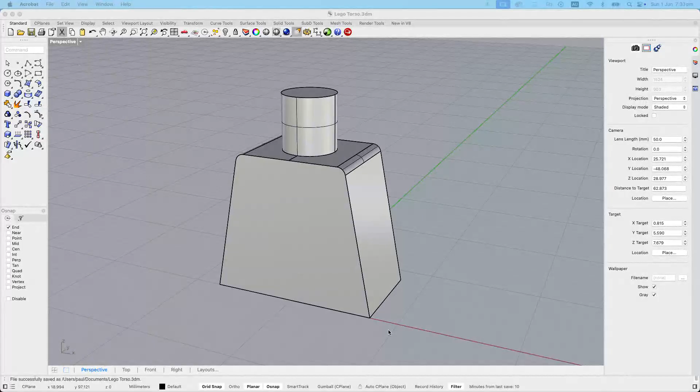This is basically the 3D model that we're going to make. It's pretty straightforward, but basically it's a trapezium that we extrude. It's got a cylinder on top, and of course it's got some filleted edges, just rounded off edges on that top sort of face.

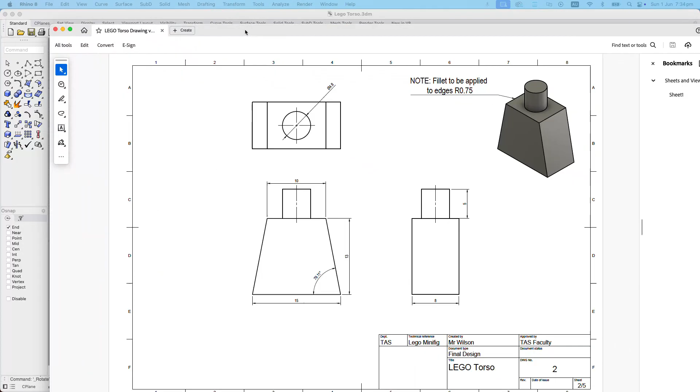So to help you with this, what we actually have is the drawing. I'll just bring across the drawing here and we can have a little look at that. We can see that in the front view, it basically looks like a trapezium. We've got some dimensions - this line across the bottom is 15 millimeters. This horizontal line up here is 10 millimeters, and the distance between those two is 13 millimeters. If I wanted to get picky, I can also see that the angle is 79.11 degrees in here.

There's a couple of things I might look at here - this is symmetrical if I put a mirror through here. So I might just model up half of this and just mirror it across there, which will give me that. What else have we got? Of course, we need to make that into a surface, like that, and then we can extrude it.

How far do we extrude it? Well, if you have a look at the drawing, it actually tells us, because in the right side view over here, we can see the distance that it's extruded, and we can see that it's a total of 8 millimeters.

Then, of course, there is this cylinder on top. We can see that the diameter of that circle is a diameter of 4.8, and you can see it's got like a funny zero sign - not quite a normal zero, but a circle with a cross through it, and that's the symbol we know as being a diameter. So 4.8 millimeter diameter, and we can see how far it's extruded upwards because we've got the 5 millimeters there.

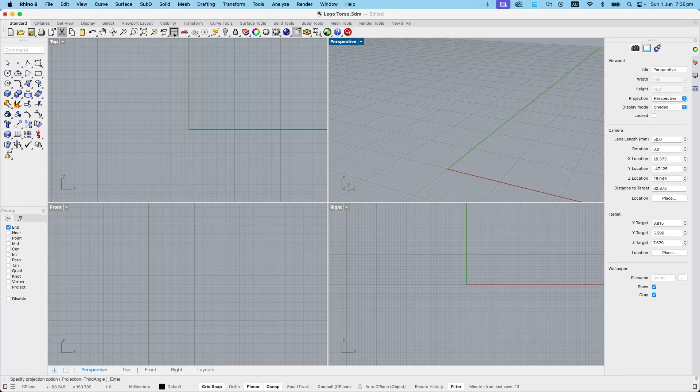I'm going to start afresh here. I'm going to actually get rid of this guy, just hit the delete key. We'll reset our 4 viewports. And here we are, so let's work in our front viewport. As always, make sure you've got grid snap turned on, planar and Osnap. I think we're all used to that by now.

I'm going to use the polyline tool. The start of the polyline tool, I'm basically going to start it here. Half of 15 was 7.5, so we'll type 7.5 into our command line, and we have designated that line there as being 7.5. I'll click there and just hit enter to finish my line. So there it is, 7.5.

Now, if I come back and bring this drawing back in here, I can see that the height, or the distance between this line and this line, is in fact 13 millimeters. So let's do that - let's draw a reference line 13 millimeters long.

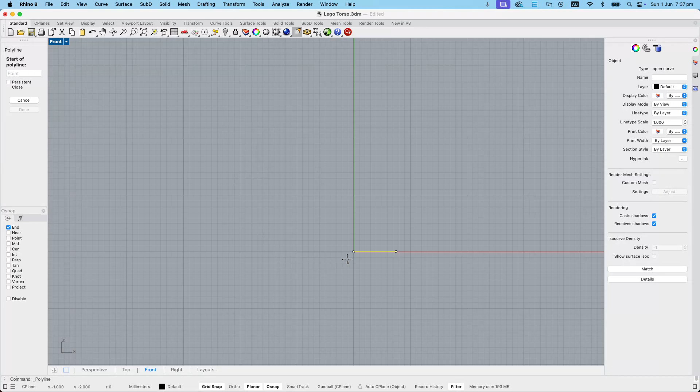So I'm going to hit polyline. I'm actually going to start here and type in 13, and I'm going to lock that in just there, and then just hit enter. So we now have a line that's 13 millimeters.

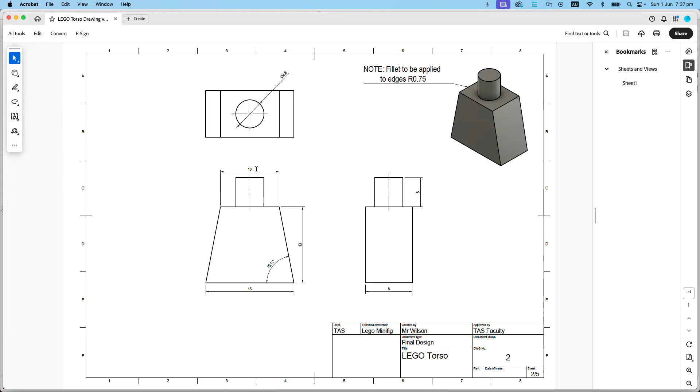Easy peasy. Now, you might also remember that this distance here is 5 millimeters. So let's do that, we'll move that back over there. And we'll go with the polyline and 5 millimeters, we'll hold shift to make that horizontal. And then whilst I'm still connected, let's connect that down to the bottom.

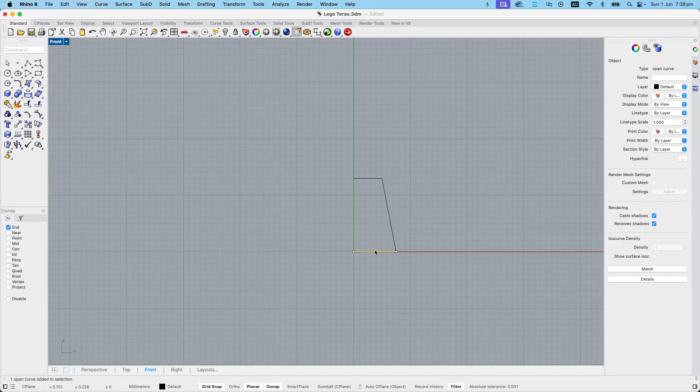Awesome, now let's get rid of this line here, we'll hit the delete key. Let's check out what we've got. Okay, we've got those two joined together, but this one is not. So let's drag a box around those, and we'll join them together with, you guessed it, the join tool, which looks like the puzzle piece there. All right, so that's our first step.

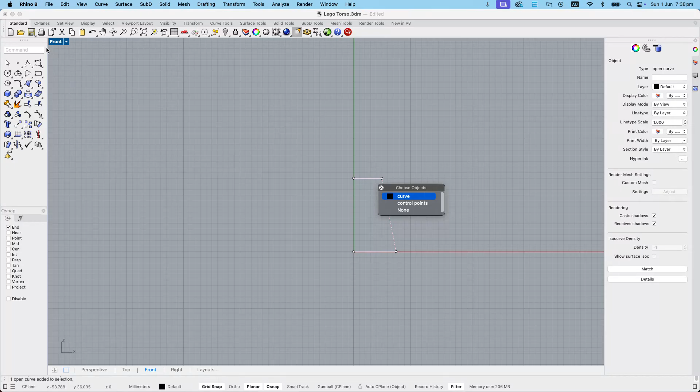We're now going to mirror this piece here. So we'll type in the command line the mirror command, there it is, hit enter. And it selects the object to mirror, so we'll make sure we've got that selected and we'll press enter there. Now it asks us to put our mirror plane in, so I'm going to click there at the top and there at the bottom. And I now have two pieces, and guess what, we're going to join them together with the join tool. All right, so you might just want to do that and hit pause.

Okay, now we're back. What have we got to do? Let's have a look at the drawing. We've created this geometry here. We now need to make this a surface, and we're going to extrude it a total of 8 millimeters, as you can see in the drawing.

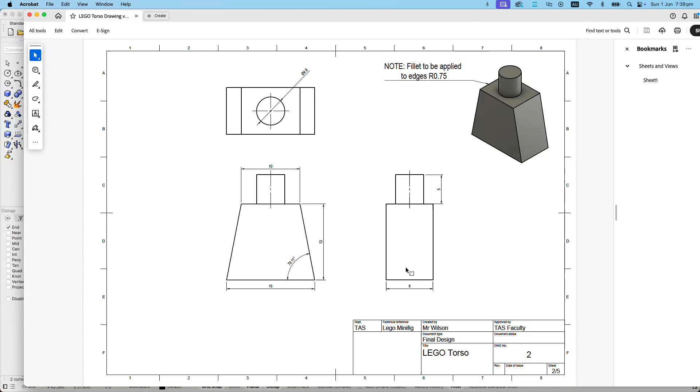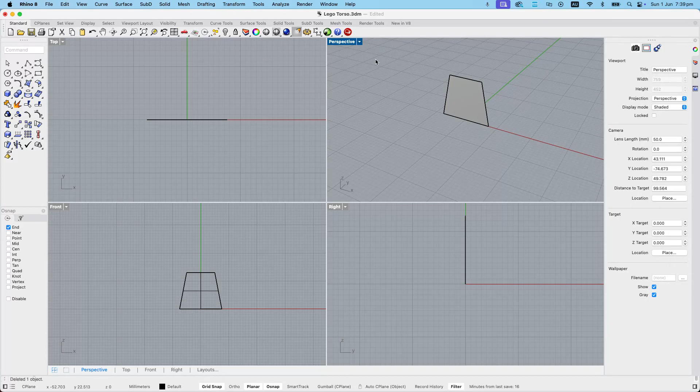So let's build a surface. We'll select this object, go up to Surface, and come down to Planar Curves. Okay, we've got that there. Now we're going to delete the original curve, which is the yellow part that's currently selected. I'll hit delete. Now in my view over here, it should show a crosshair.

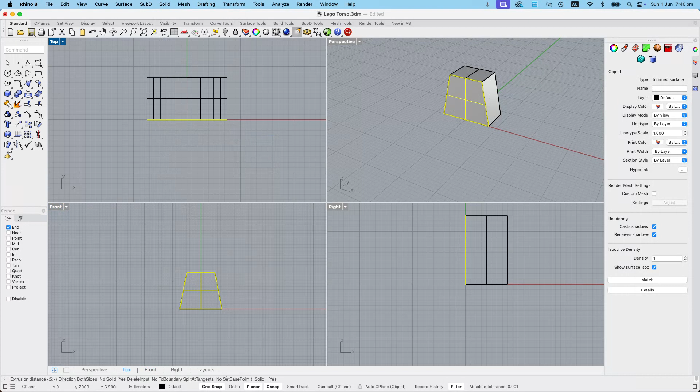You know what I'm talking about. I'm working in a newer version, don't forget, so that's why it doesn't show it. All right, let's select that, and we're going to go to Solid and Extrude Surface Straight. We're going to extrude that a total of 8 millimeters. So let's hit 8 there. Hey presto. There's the original surface, which I don't need.

We'll hit delete. Now what we'll do is work on the cylindrical feature, which is the part they use to attach the head. It's centrally located. If the drawing doesn't provide dimensions for where to place something, the assumption is always that it is centrally located, i.e. in the middle.

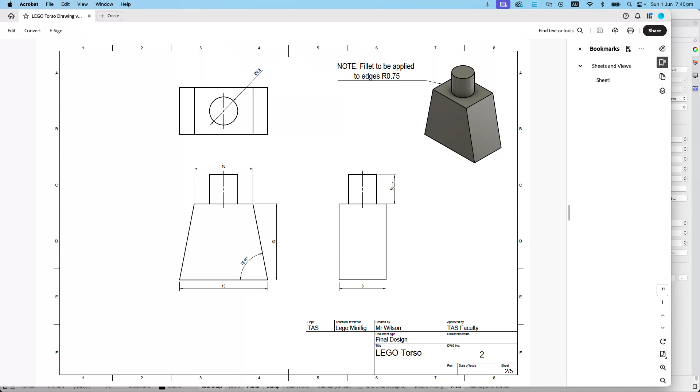Diameter 4.8, extrusion 5. So let's go with that. I'm just going to enlarge my top viewport, and we're going to work with a circle, and I'm going to find the center. The center is there, nice and easy. And I'm just going to pull out here.

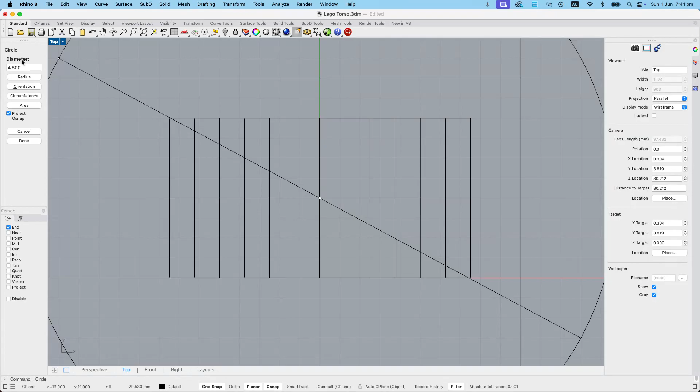Now make sure yours is set to diameter. If it's set to radius, you'll need to hit the D key and press enter to switch it to diameter. I'm going to type in 4.8 again. There it is. All right, let's go back to our 4 viewports.

Where is this guy? Now this is interesting, it's down on the ground plane here. So if we hold our shift key, we can move this up to its position that it needs to be in. Now, whilst we're here, we now need to make this into a surface.

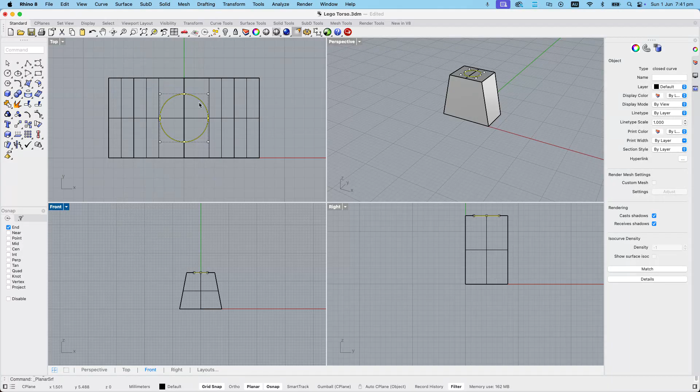So we'll go Surface, Planar Curves. Okay, whilst this is highlighted, we'll hit delete. And now we can select the surface here, and we're now going to extrude that a total of, what was it again? Let's have a look - 5 millimeters here. So we're going to go upwards 5 millimeters.

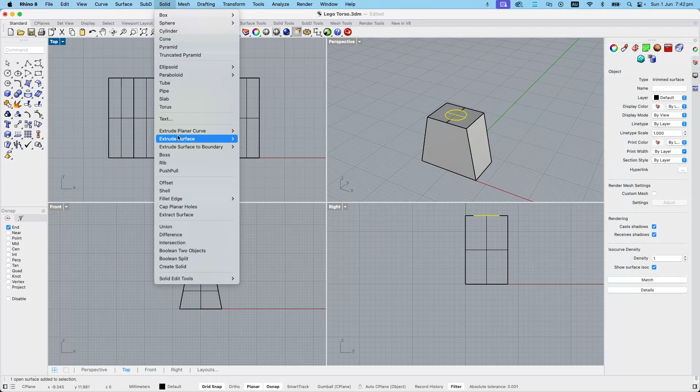Okay, so we'll go Solid, Extrude Surface, Straight, and we're pulling this up. We're going to type 5 into our command line, hit enter. Hey presto, I don't need this surface which is currently highlighted, so we'll hit delete on that.

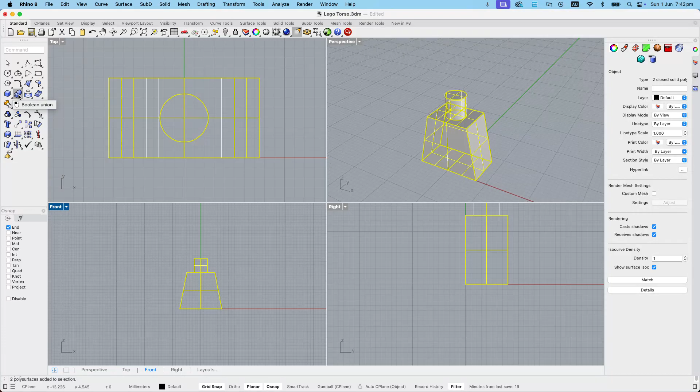But what we'll do now, if we actually click on the body, we'll see we have a body here and we have this cylinder. So what we'd like to do is union those two items together so they actually become one. I've selected those two objects, going over to my tools to find these two spheres here - it's called a Boolean Union. If we click on that, it will bake those two parts together, and we'll now find that when we click on it, it just acts as one.

Okay, one more job to do. If you want to pause, you can pause now. Great, you're back, let's continue. As I said, one more job. We need to look at the drawing here and we can see that there is a note that the fillet is to be applied to the edges.

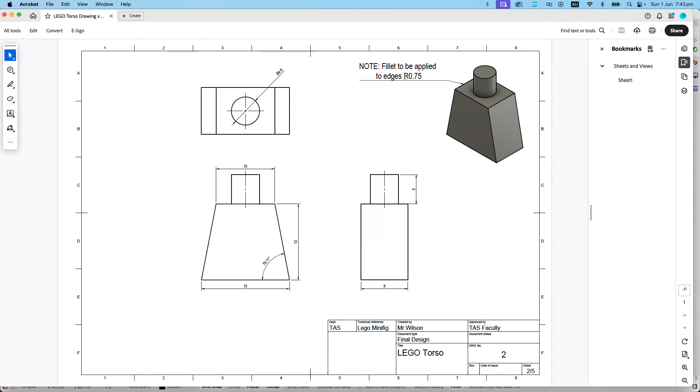That's these two top edges. We can see it's a radius of 0.75 millimeters. Easy peasy, let's get that done.

In the command line, we're going to type Fillet Edge. We're going to come down - there it is, Fillet Edge. And we're going to type in the radius value, 0.75, and hit enter to lock that in. And you're going to select the two edges, those two upper edges.

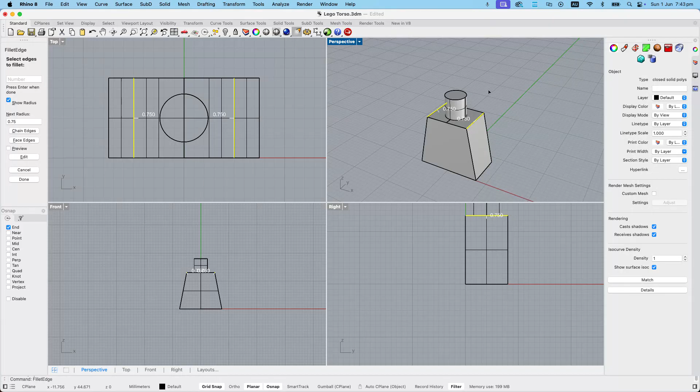And I'm just going to zoom in so you can kind of see that, and I'm going to hit enter to confirm. Yes, that's what I want to do, and I'm going to hit enter again to accept, and there it is. So that is our torso that we're going to use as our Lego minifig body, as it were.

So let's save that. Let's go to File, Save, and I've already saved this, so you can actually see it says Lego Torso here, but you're going to go and name that Lego Torso. And once you've done that, job done, great work, and I'll see you in video 3.